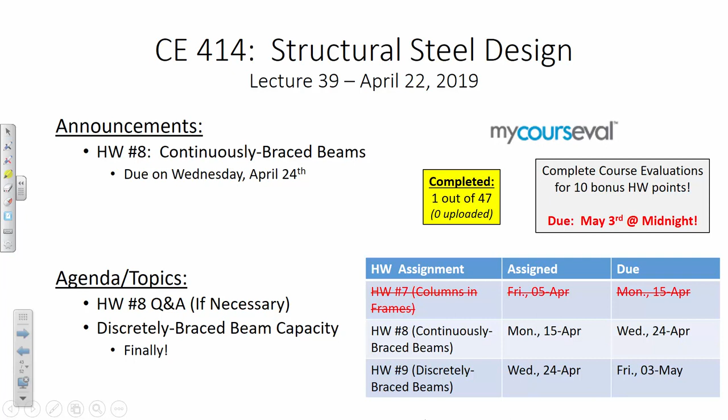Your time in the spotlight, we'll move on. I mean, but come on, this is pop culture. This is coming from the dorky engineer. All right, settle down. Okay, so, everybody settle down. So, let me say this.

Today we're going to finally talk about discretely braced beam capacity, and I'd argue that this is probably the lecture where we finally just reveal what's going on with capacity. We've been sort of dancing around it for a really, really long time, and I kind of want to just pull back the curtain and say, all right, here it is.

Before I show the curve, I do want to just remind everybody what we had concluded last time. We had concluded that the curve was going to look something like this. We have LB on this axis. We have MN on this axis. There were a couple of things that we had concluded before we even drew the curve. We said that right here, when LB is 0, what is MN? What is M going to be? We had already done this. MP, the plastic moment. Because when the beam is fully braced, when LB is 0, its capacity is the plastic moment capacity, right?

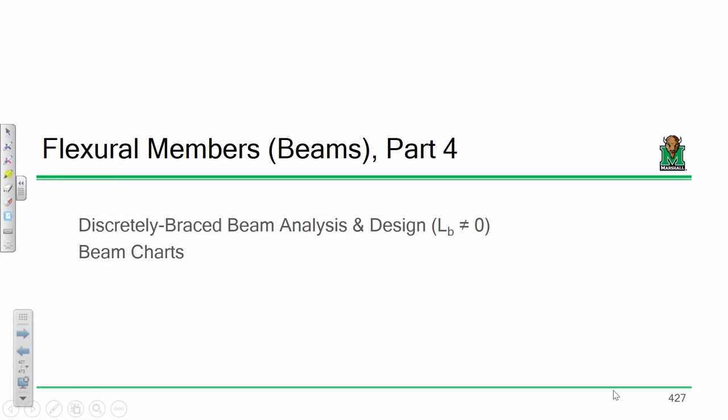If I have a beam, it doesn't really matter what's going on with the boundary conditions. LB is how far apart your braces are, right? So what this is saying is that the farther apart the braces are, the weaker the beam is going to be. Okay, so first off, the spec defines 3 zones of beam behavior. This first zone over here is what we're calling essentially the MP zone. This is a zone where the unbraced length is really, really small. Everybody see what I mean?

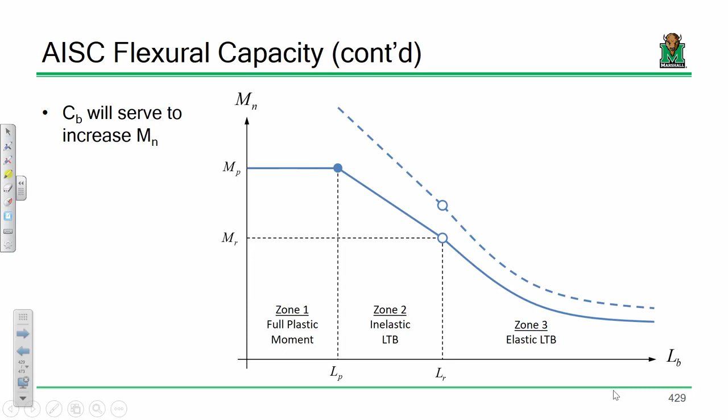So I want y'all to watch up here. Okay, so here's just the standard curve, and this is what happens when you apply C sub B, is that the curve gets bigger. C sub B is larger than 1, so the capacities get bigger. But here's where you got to pay attention. I don't really give a damn what C sub B does. The capacity is always cut off at M sub P.

Okay? So C sub B is a really powerful tool in that it can augment your buckling capacity to account for that non-uniform moment. However, it does have one limit, and the limit is that used improperly, it can magnify capacities above MP. I don't care what's going on, MP is the maximum bending moment that a beam can withstand, period. So all of the equations that we're going to see here in a second all have a limit. They basically say the capacity is the minimum of this pile of junk, or MP. And that's why, because C sub B can serve to falsely augment the capacity.

Now, just so you're aware, I'm going to show you all a bunch of equations. You don't have to worry about marking them down because I got a nice little guide at the end that summarizes everything you need to know. So don't worry, I'm just going to walk you through it. Okay, is everybody with me so far? Don't worry, we're going to define the terms explicitly, but everybody with me so far?

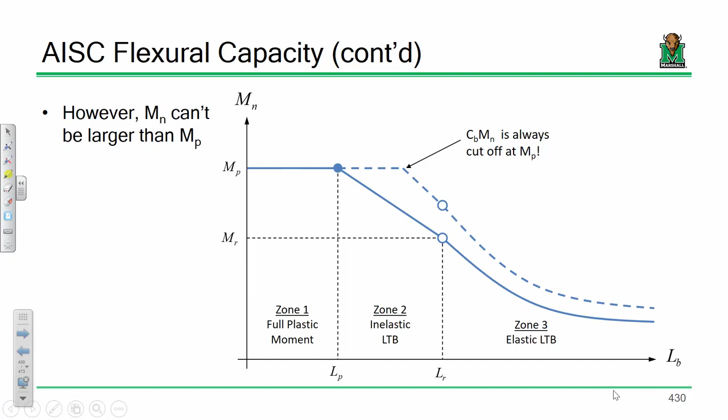Okay, now, if you have a beam, and this is your unbraced length, the first question that you're probably going to ask is, well, am I here, here, or here? And that depends on what LP and LR are. Now, I'm going to tell you, this LR equation is probably the nastiest equation in this entire course.

The LP requires a lot of testing, a lot of data analysis, and you've got to put some thought into figuring out which is going to govern the capacity. LR, while it looks nasty, is really just an algebra problem, because all we do is set that differential equation equal to 0.7 times the yield moment and just solve for the length. So does it look nasty? Yeah, it looks nasty, but it's pretty straightforward.

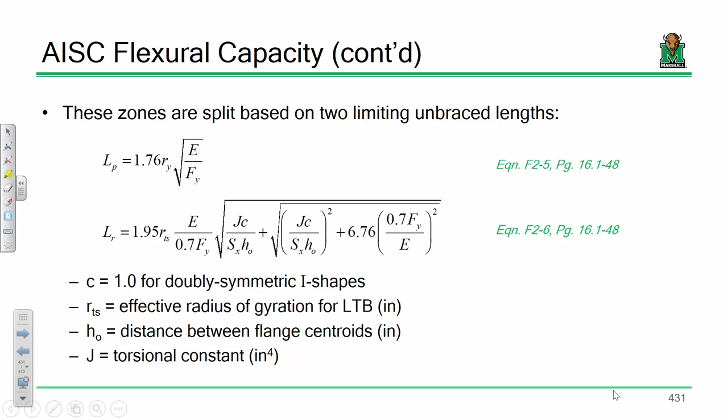Now, this LP and this LR distance can be some fairly laborious calcs. Fortunately, you don't have to do it. Remember the Zx table? LP and LR are already computed for you, so you don't have to go out of your way to start chugging out LP and LR. They're right there. Okay, so I'm telling you, this Zx table is probably one of the most valuable tables in the spec. Not only does it calculate LP and LR, it also calculates MP and MR. So you've got this value and this value computed for you. So that's a pretty worthwhile table.

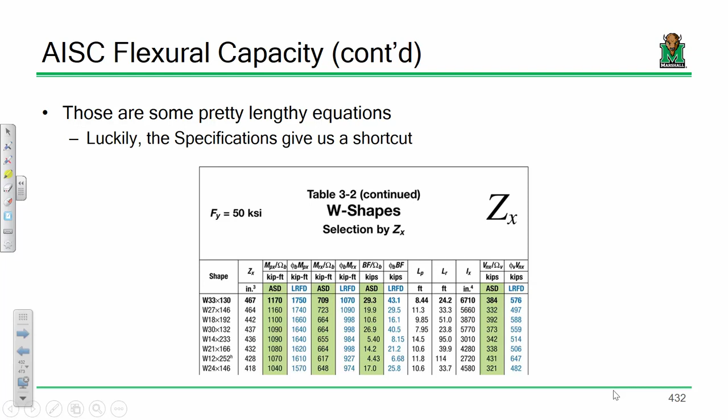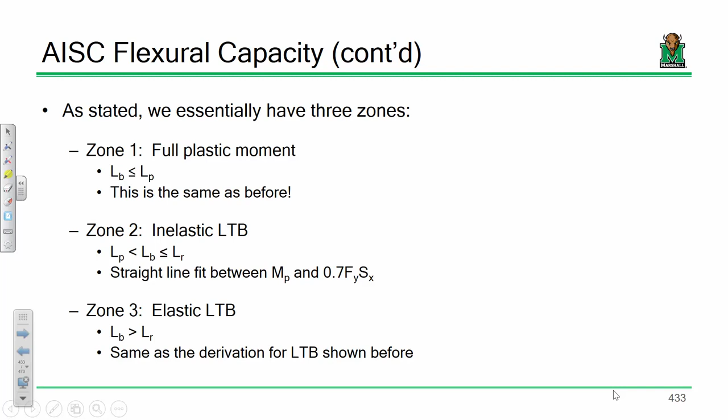The only one that isn't quite described yet is this BF factor, but it's a lot easier than you would think. Okay, so let's get into the math. So essentially, like we said, we have three zones. We have zone 1, where the capacity is the plastic moment. Zone 2, where it's inelastic buckling somewhere between LP and LR, or elastic buckling where it's greater than LR. So zone 2 is just a straight line fit between MP and MR, and then zone 3 is the same as what we derived earlier, that differential equation derivation, same as before.

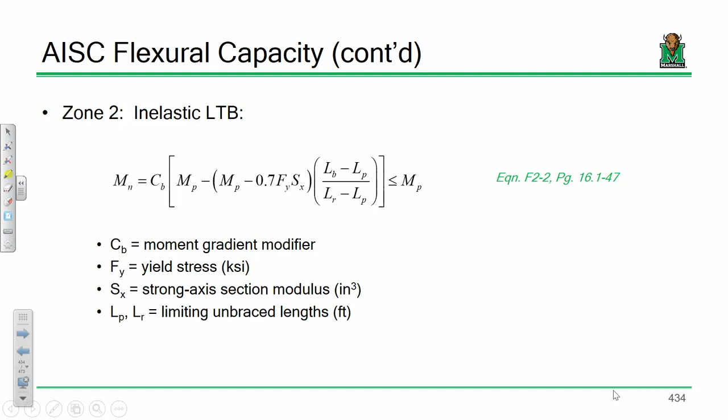Yes, sir? If you were calculating braces for a bridge and you're using a steel plate girder, you have to calculate all your LPs and LRs by hand? Yeah. The short answer is yes, but that's where the beauty of Microsoft Excel comes into play, because you build a spreadsheet, you compute it once, you never have to do it again, just plug in your numbers and it does all that.

So yeah, I'm showing you the equations for that very reason, that if you're ever looking at a plate girder or some shape that's not defined by the spec, bless you, and you're going to have to grunt it out, it's all here. And here's the thing, you don't even have to have the slides for it.

It's all in chapter F right here, so it's not like I'm showing you anything that's not in the spec. Bless you. Does that answer your question?

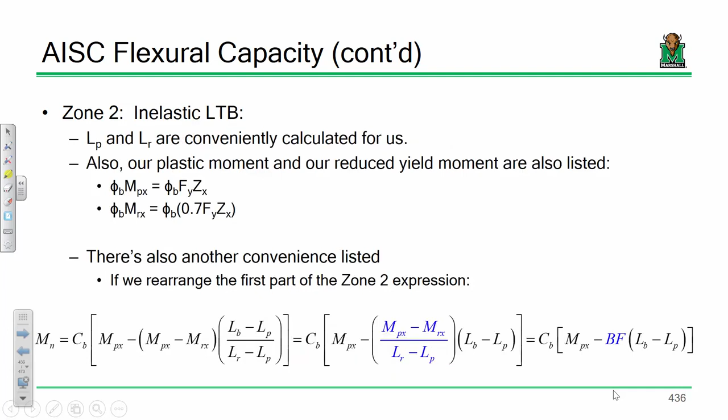Everybody else good? Okay, so zone 2, we've got this really nasty equation, but we can take this equation and make it a lot easier through the use of this beam factor, which has already been calculated for us.

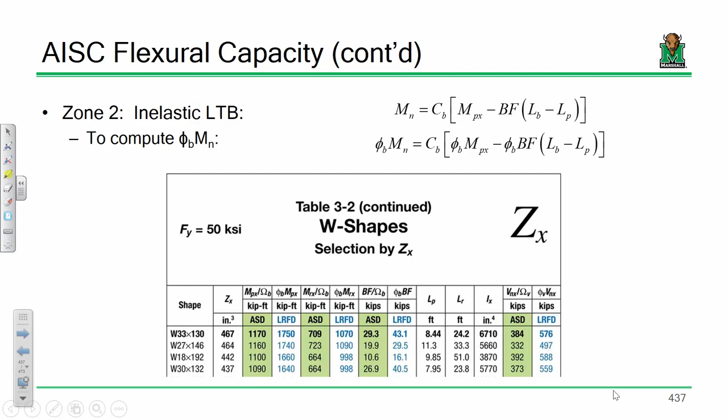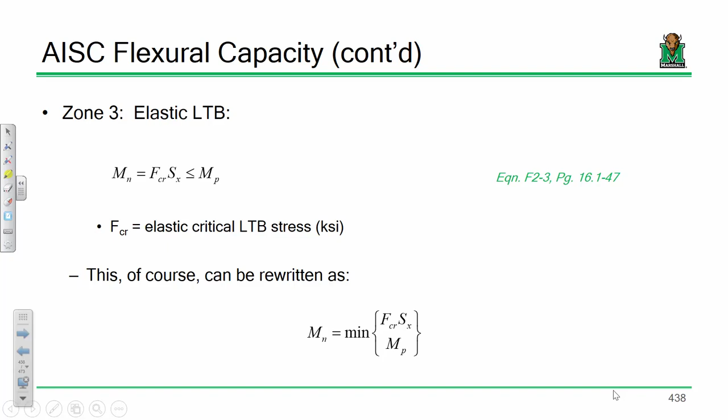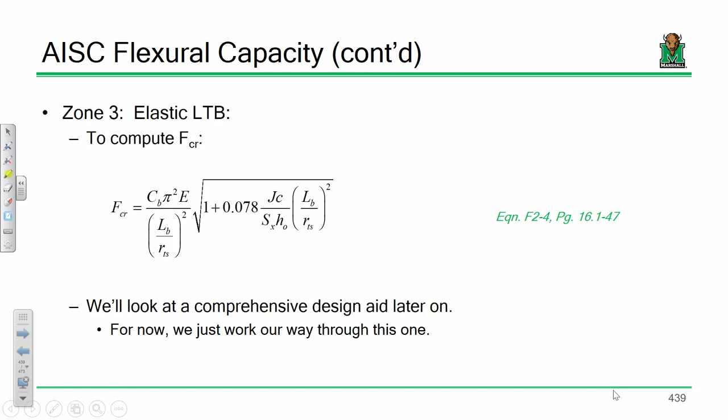Zone 1 is really easy to compute. Zone 2, really easy to compute. Zone 3 is the only one we kind of have to grunt out a bit, because there just isn't a shortcut for this equation. It's the only one we just have to roll up our sleeves and do it. Now, there is a comprehensive design aid later, but we need to walk before we can run, so right now just trust me, it's a lot easier to grunt your way through this one.

So if you want to put a nice little star or bookmark around slide 440, that would be a good place to do it, because I'm summarizing all your equations in one nice, neat, concise scenario. So zone 1, the capacity is MP.

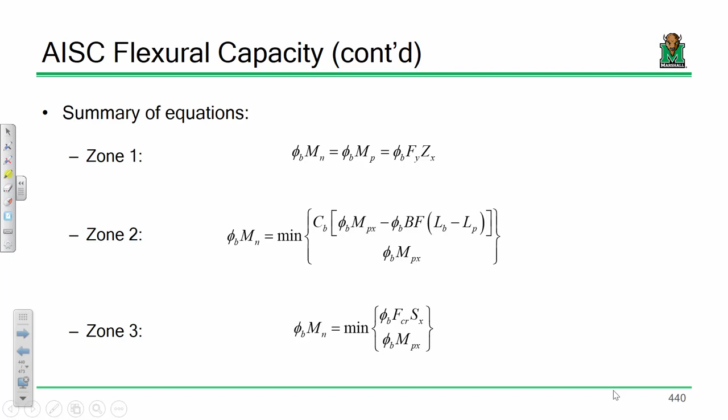Zone 2, it's either the straight line fit or MP, whichever is smaller. Zone 3, it's either MP or this expression here. FCR is that, there's your C sub B equation. All of these new terms like LP, LR, the beam factor can all be found in the ZX tables. This is one to definitely bookmark in your notes, whatever you name it.

Okay. Now, does anybody have any questions? Yes, what's an RTS version?

RTS is sort of like a radius of gyration for LTB, and it's a lookup. We're actually going to investigate that in this example, so don't worry. You'll understand how these expressions work pretty easily.

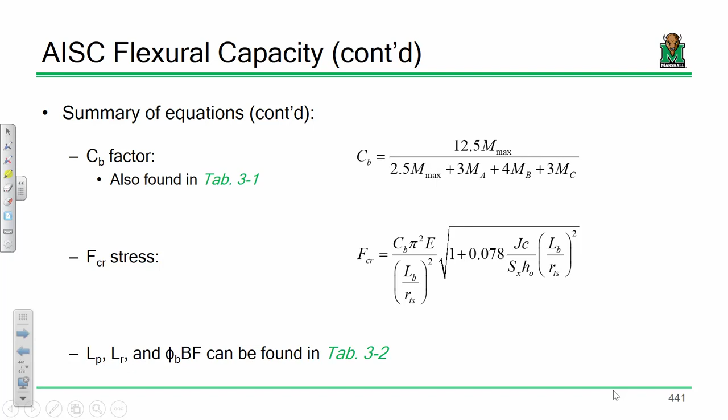Everybody good? Okay, now I'm showing a bunch of equations up here and a bunch of formulas and variables and all that. I think it's worthwhile to just grunt our way through it and do it. Okay, so I have a beam here.

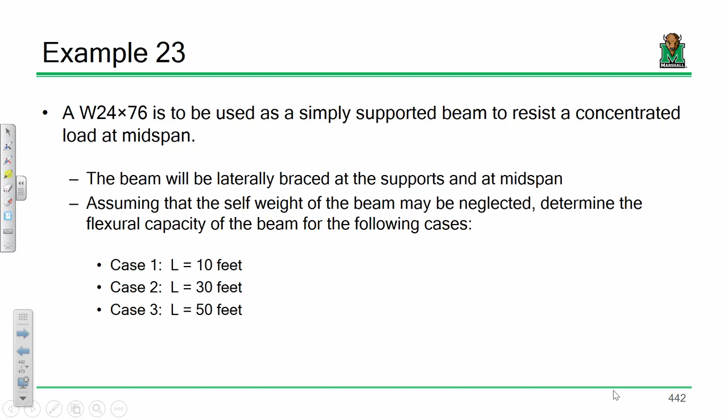Example 23. So first off, from Table 3-1, C sub B is 1.67. So that's going to be a simplification.

Now let's look up some properties for this 24 by 76. I didn't tell you what the yield strength was explicitly for this example. However, when I don't tell you what the yield strength is for a W shape, what is the preferred material spec for a W shape? A992. What's the yield strength for A992 steel? 50. So if I don't tell you, that doesn't mean you can't assume the most reasonable value to move forward. In fact, I may not tell you—see what you come up with.

Now we're going to need some values. First off, let's everybody turn to table 1-1 and look up the W24 by 76. Now you're not going to need every property, but I'll help you through the ones that you will need. Has everybody found the 24 by 76? Page 1-18. So if you aren't on page 1-18, hit page 1-18, if you brought your AISC 15th edition steel construction manual. I'm looking at some folks who don't have theirs out.

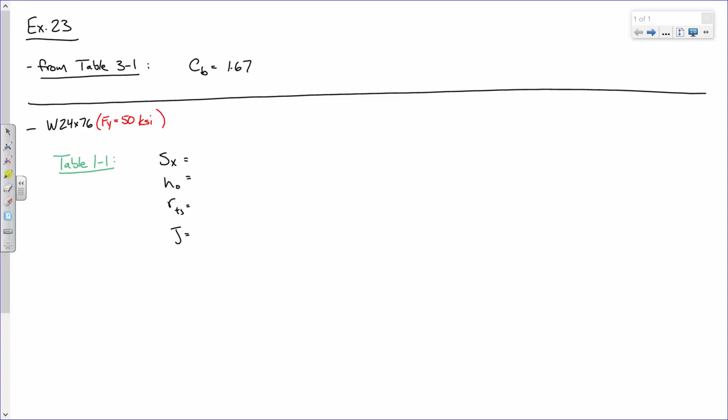All right. Now, instead of writing down every single property that you would ever need, I'll walk you through what we will need. We're going to need SX. We're going to need H0. We're going to need RTS. And we're going to need J. Now I'll define what each of these are here in a minute, but let's get the values first.

So what's SX? 176. All right, H0? 23.2 inches. If you're curious what that value is, all H0 is—if you have an I-beam, H0 is from center of flange to center of flange.

That's H0, that's all that is. RTS is the radius of gyration for torsion, for LTB, for lateral torsional buckling. So what does that come out to be? 2.33 inches. And what's J? 2.68 inches to the fourth.

Okay, so the next thing we're going to need is to look up some values from Table 3-2, the ZX table. I'm just going to forewarn you: when you're doing beam analysis and design, I'd say that more than anything, it involves you flipping back and forth from table to table, and it just sort of is what it is. Now some of these guides try and do a good job of not making you do that—for instance, the ZX table also lists the moment of inertia and things like that, but it just sort of is what it is.

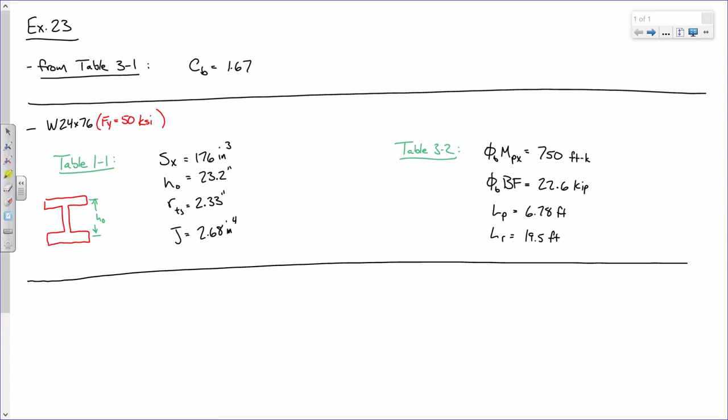Because here's why. That's a good question, that's a really good question. And the answer is basically because of this right here.

In order to use Table 3-2, so for instance, Table 3-2 says zone 2 is the minimum of this pile of junk or the plastic moment, but that's already been adjusted by phi. So if I'm going to adjust this by phi and this by phi, I have to make sure I'm comparing apples to apples, which is why the beam factor values in Table 3-2 are listed in both ASD and LRFD.

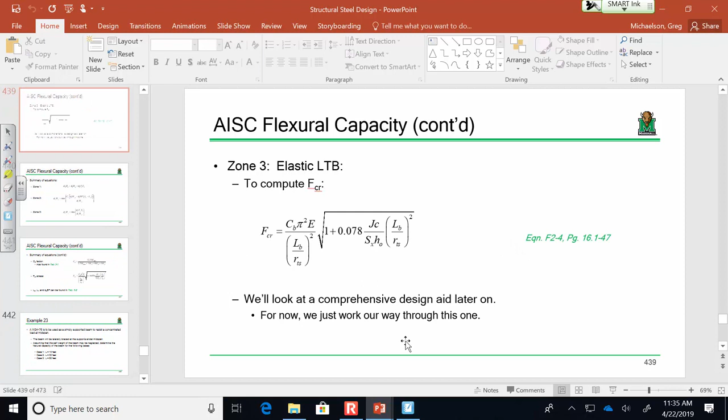So they are accounting for both. Because, see, this would be a better slide to look at. This is the simplification, but if I want phi in, I have to multiply everything. Does that make sense? This is a good question. Everybody good? Did I answer your question?

Yeah, that's kind of like changing that slope, right? Well, you're multiplying this whole curve by phi when you factor it anyway, so this is going down, so you are changing the slope. Think what would happen if you took this and multiplied it by 0.9, just like what C sub B does. What does C sub B do? Multiplies everything up. Is everybody okay with that? Did I answer it? Everybody good?

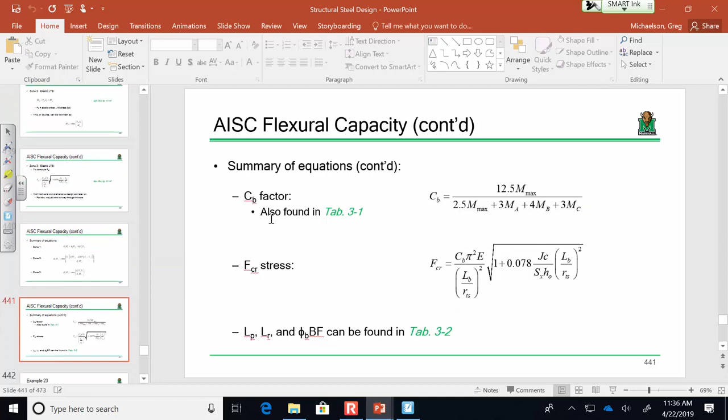Okay, let's start getting into these cases. Here's the example. We have 3 cases: one where the length is 10 feet, one where the length is 30 feet, and one where the length is 50 feet.

So let's look at case 1. L is 10 feet. If case 1, L is 10 feet, what's LB? 5 feet. I want that to be crystal clear to everybody in this room, okay? The beam is 10 foot long, but I don't really care so much anymore. When I'm computing capacity, I don't care about how long the beam is, I care about the distance between braces. So the beam is 10 foot long, I need the beam length to do the structural analysis, but to compute the capacity, I care about this distance, and that distance is 5 feet.

Does that make sense? So for case 2, LB is what? 15. And case 3, LB is what? 25. Okay, I'm not moving forward until I have a good idea that everybody understands what I'm talking about here. This is really important. There is a difference between the length of the beam, which you need in order to determine reactions, shears, bending moments, all that, versus LB, which is what you need in order to determine how strong the beam is. That's really important.

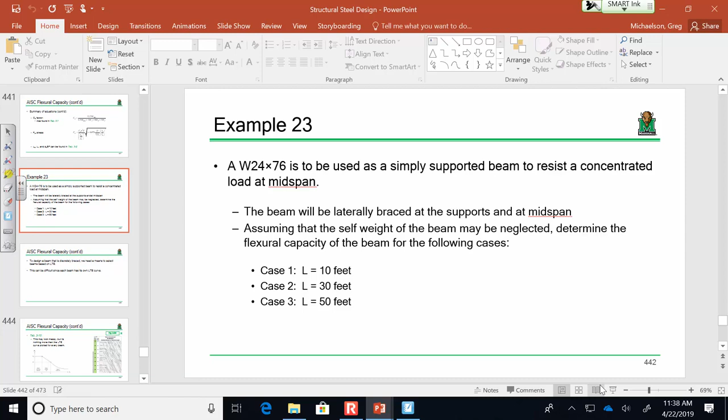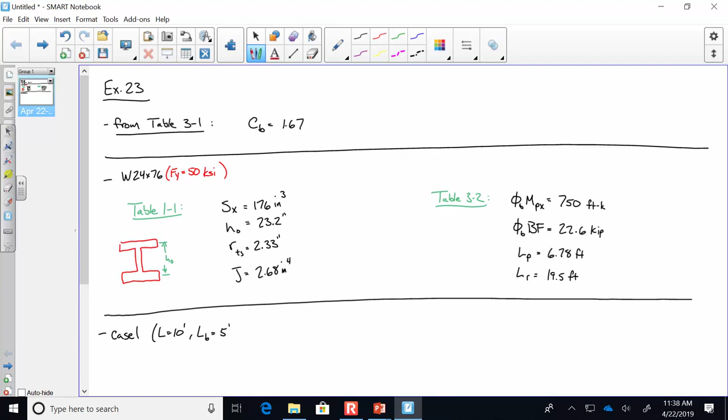Okay, so let's take a look at case 1. Now I want you to tell me, with case 1: L is 10 feet, LB is 5 feet. Tell me, what zone are we in? Fully plastic. Fully plastic, yeah, so we're in zone 1. And we are in that zone because LB is 5 feet and LP is 6.78 feet, so LB is less than LP.

And so here's our curve, and we're here. So this beam's got braces all over the place. And when the beam's got braces all over the place, what's the bending capacity? MP, right? So therefore, phi Mn is just phi MP.

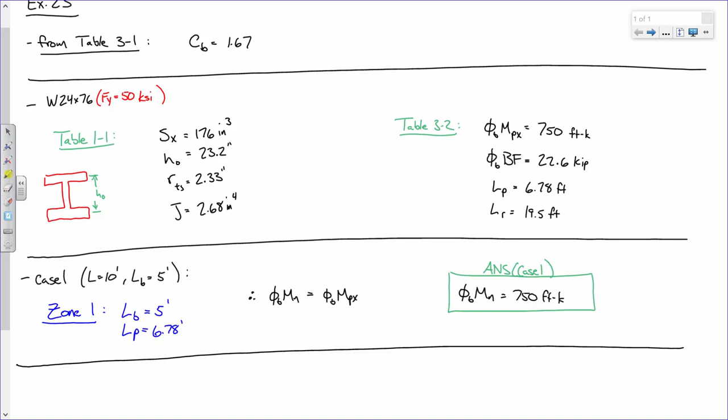Does that make sense? All right, any questions? All right, case 2. So case 2, we have an L of 30 feet, LB of 15 feet. What zone are we going to be in? Zone 2, because LP is 6.78, LR is 19.5, but we have an LB of 15 feet. Does that make sense, that we're between these two? So we're somewhere in here, right?

So our capacity should be on this straight line fit, but don't forget we've got that C sub B value. It's going to rear its ugly head here in a second. So I'm going to go to the slide because I want you to see exactly where I'm getting these equations from. So when you're in zone 2, this is your capacity. I'm going to copy and paste this directly on the notes. There's your capacity.

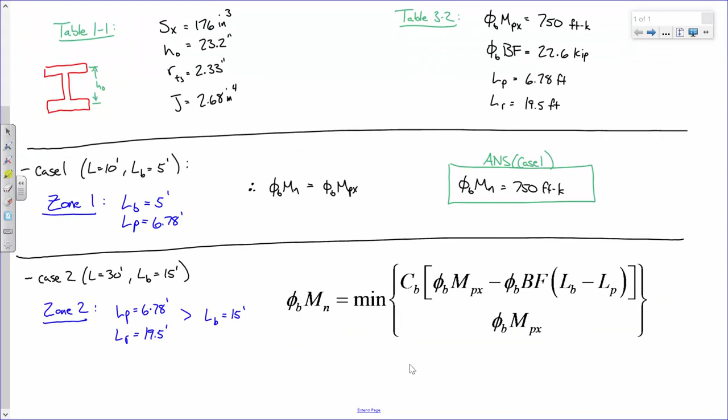I want you to help me out. Is there anything in this equation that we don't know? What's C sub B? What's MP? 750. What's our beam factor? We know LB and LP, so this is a plug and chug. So, what was the beam factor? 22.6?

So what are we getting for this upper expression? What are we getting for this? 942.26. Do I have a second on that? That's foot-kips and that's minus... minus. Do I have a second on that? He said 942. Yeah, so what's the capacity? 750. And so the answer is also 750.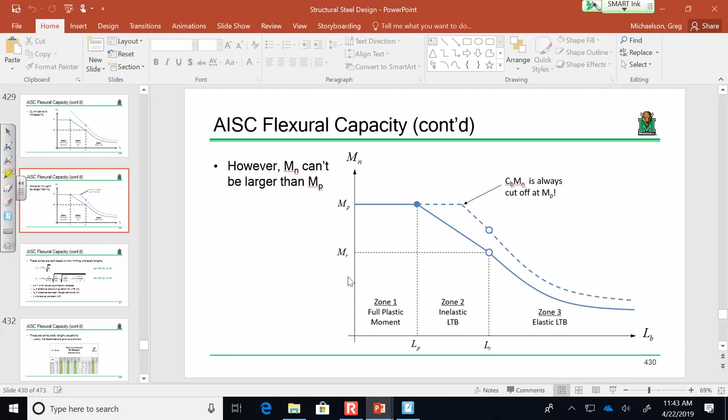So, okay, well, that popped up. So let me go back a couple slides just to illustrate. Remember this equation right here? Remember this expression here? Ultimately, what happened is we just did the math, and that 942 was a capacity somewhere right here, between LP and LR, but above MP. And remember, I don't care what's going on with C sub B, you always cut that capacity off at MP, and that's exactly what happened here. The computed capacity was well above MP, and that's what we got. Does that make sense? Okay.

Last one is zone 3. If I could untangle this, I think you could probably see where this is going, because case 3, which is L equals 50 foot, LB is 25 feet. Well, LB is 25 feet, LR 19.5 feet. We're definitely in zone 3, right? That's pretty straightforward. And here's the thing. There is no nice, pretty little guide or aid to work your way through these equations. You're just going to kind of have to muscle through it. And so the way that you do that is you start off by computing FCR.

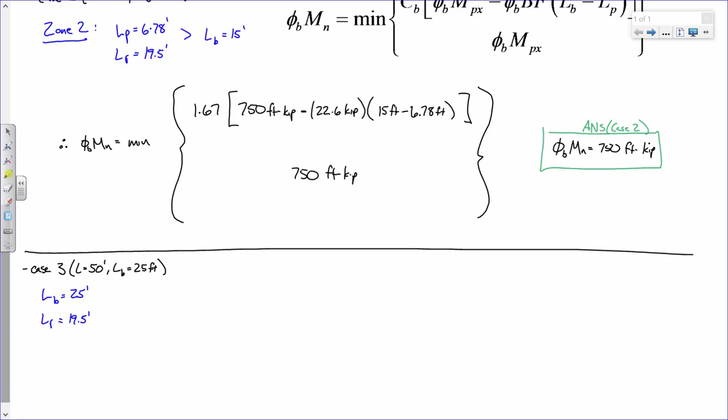And FCR is C sub B times pi squared times E over our slenderness squared, and then the square root of 1 plus 0.078 JC over SX H0 times LB over RTS squared. Okay. And so this is something that, quite honestly, everybody should practice and make sure that they're comfortable with, but there is something you got to watch out for. Okay? Let's look at this outside fraction.

So what's C sub B? 1.67. Pi squared. What's E? There we go. Now, what's RTS? 2.33 inches. So what's LB? Say it again. 25 times 12. That's exactly right. LB is 25 feet, but that equals 300 inches. Units. Gotta match your units. So this is 300 inches divided by 2.33 inches. Don't forget to square it. So make sure that you're watching your units on that. That's really important. Okay?

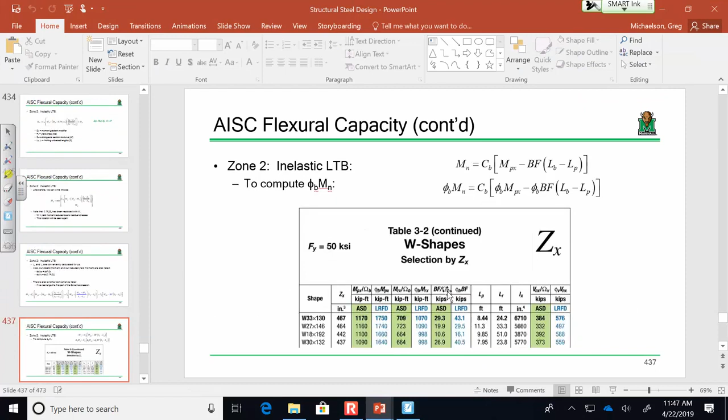Okay. And so we have 1 plus 0.078. And then we've got a couple fractions. So what was J? 2.68. Wait, what? 1 plus... Yeah, I'm sorry. Hold on. Yeah. That was my fault. I should have copied and pasted. I meant to copy and paste the formula. I should have done that. I apologize. It's still not 7. Not even.

Okay. The C value, C is always 1 for I-beams, so you can almost just sort of ignore it. SX is 176 cubic inches. Okay, I got it. 176 cubic inches. H sub naught, 23.2 inches. So help me out. Inside the brackets, what are the units going to be? Unitless. In fact, everything inside this square root is unitless. Lastly, we have 300 inches over 2.33 inches squared. So if you look at the units, everything under the square root, the units cancel. Down here, the units cancel. The only thing that retains units is whatever E was in. So it's KSI. And it's a stress. We're calculating FCR, so it's a stress.

So you really ought to be comfortable with this calc, because this is feasibly one of the longest calcs you really could do. Not just for beams, but I'd say really in this class. This is probably the nastiest formula we've ever used in this course, period. But not only that, it's probably one of the nastiest formulas that we use in steel design, period. Sorry, what did you say the 1.0 was for with the JC? That's a good question. So it's sort of a modification factor in the spec to modify this formula if you're not using an I-beam. But we're always going to be using I-beams, so we just take it to be 1. That's a good question. It's that, and then there's values for channels and whatnot.

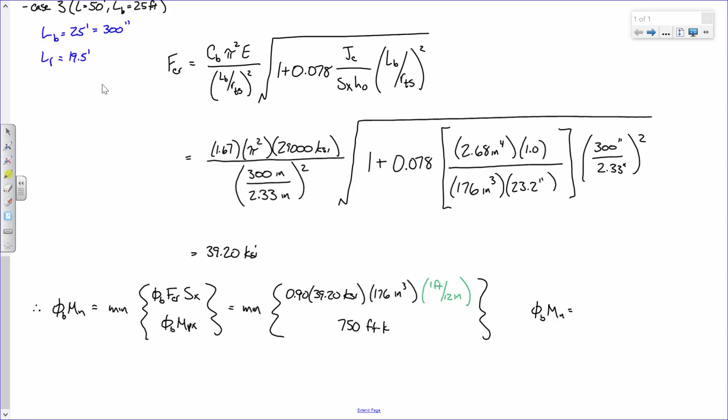So we'll call it after this. Right. I got 517.44. So 517.5. Anybody have a second on that? There we go. Okay, I know these equations were a little long, but is everybody okay with this? It's not too bad, right? There's no iteration or goal seeking or anything. It really is plug and chug.

All right, hold on. Any questions? All right, just be clear. Wednesday, y'all have homework 8 due for me. And finally, when we come back on Wednesday, we are going to use this for design.